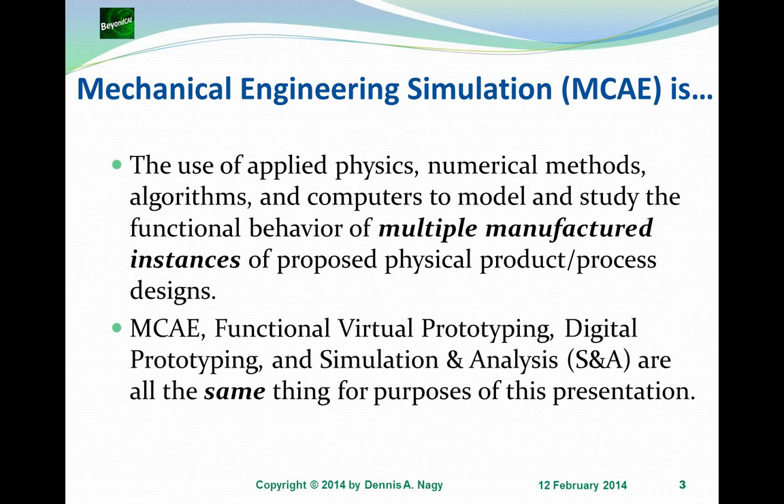The topics I'm going to cover here are a little bit of a historical perspective, how MCAE transitioned from primarily a technology topic and subject and activity to one where business more and more drives it today.

Vendors who came into existence with that technology to create software and related solutions for industry have grown up, and some have consolidated, others have emerged more recently. So it's still a very active pipeline, I would say, of companies at all levels of size and maturity in the MCAE vendor world.

I'm going to talk a little bit about the structure of the MCAE vendor industry, who are the major players, what relationships do they have with each other, some technology issues, and the rest will be covered in the next webcast on the 25th, where I talk about where all this is leading to in the future, in my opinion.

So I found this is an interesting way to describe what's called the engineering simulation food chain, where you start out with, as I said in the earlier slide, physics, math, computer science, all enter and combine into research that develops methods for doing engineering simulation.

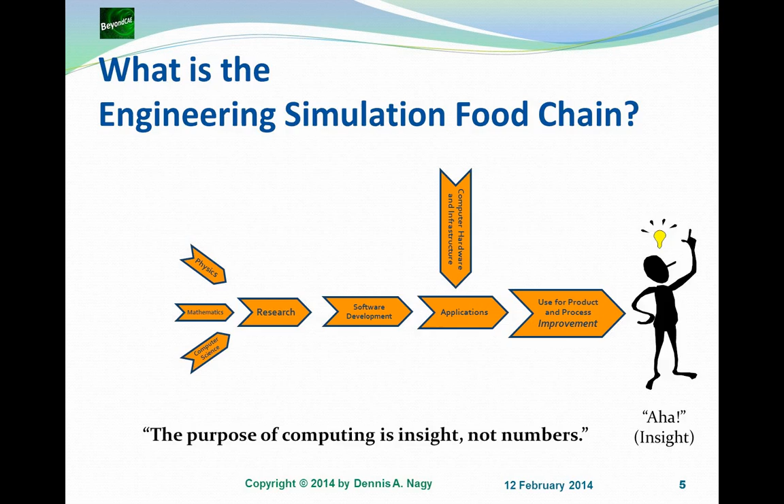And the roles of these various entities that play in this food chain, I'm going to show here just as a background to where then I'm going to focus a little more. You have at this end, of course, universities and government laboratories primarily. Clearly, some software vendors are also involved in some of that very basic research if they have the money and the bandwidth to do that. But in general, it comes from universities and government labs.

Then the independent software vendors pick that up in the form of collaboration, in the form of funded research, or just taking the published technical work papers and then implementing them in software, sometimes taking software that was developed in a research mode and making it production ready, commercializing it. But anyway, that's their emphasis, and they go on into being involved in applications because that's what drives the software development if it's going to be useful for industry.

They have to understand the key applications that they're targeting, which is why a number of software vendors have consulting arms that represent anywhere from 10 to 30% of their overall business, because that's their proving ground as such with real industry problems. As you get into the application area there, you see that computer hardware and infrastructure enters in, that the software vendors also have to interact with and have partnerships with the various computer hardware companies and infrastructure companies. You get a lot of engineering consulting services.

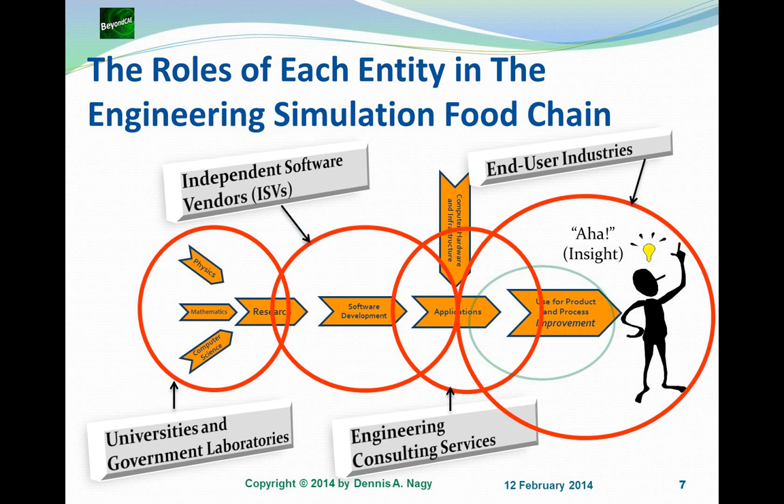And then finally, of course, the big payoff are the end user industries, where all of this, hopefully, if it's all been done right along that food chain, leads to productive use by more and more people in end user industries wherever simulation can, in fact, provide additional insight. That's a whole separate topic that I'll get into more in the next webcast on the 25th as to what are the trends there and what are the enablers and so forth. So here's what I'm focusing mainly on, what you see in the green oval there, both in this webcast and the next one.

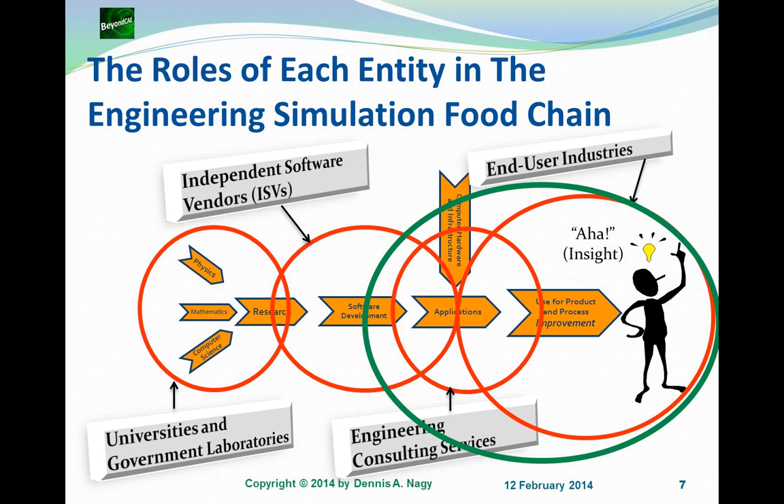So here's a little 5-cent tour, as I call it, or 5 euro cent for those of you listening in from Europe, or some number of yen or whatever, renminbi. This is the short tour going back to the 50s and 60s, where basic R&D work and the first very simple software programs were done, mainly in the aerospace industry, or ironically in the civil industry in frame and truss structures. Boeing, MIT, NASA, European Space Agency, and others were key players and entrants that early on.

The sort of seminal paper on the finite element method actually came from 5 authors at Boeing in 1956, and they continued to do their own development. Also, a number of aerospace companies pushed NASA to get into the game, and NASA put out an RFQ, which led to the funding and development of Nastran, which I'm sure a lot of you are familiar with, back starting in about 1966. MIT started developing engineering software for civil engineering in the early 60s already, and it got much more intense in the late 60s. I was, in fact, as a student there, involved in some of that back in those days. And I could go on here, but it's not as critical as saying, okay, where did this go to?

Mid-60s to 70s, the basic methods for MCAD, which was really computer-aided drafting, came into play, which provided better information on geometry for doing simulation, as well as early commercial MCAE software came into being around that time. And of course, the emergence of sufficient compute power to allow somebody to do any kind of reasonable simulation. So companies like MSC, SDRC, ANSYS, Abaqus, Marc, MathWorks, and others were founded during that time frame. As you see, and I'll mention it later, a number of these have in turn been absorbed into larger companies as the industry consolidated into the bigger CAD and product lifecycle management industries.

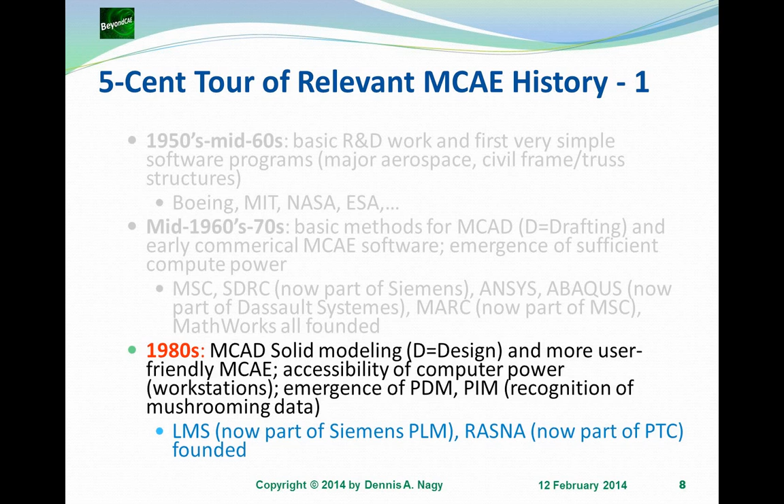Then in the 1990s, you really started to see the true linking of solid modeling, MCAD, to MCAE in wider production use. More and more of the CAD and PLM companies started cooperating with CAE companies to produce bidirectional interfaces and the ability to pass CAD geometry in a form of solid models to CAE programs for applying loads, boundary conditions, pressures, whatever, and meshing, and then running the

simulations. And the whole issue is related to how clean does that geometry have to be, who's going to clean it up, the CAD companies or the CAE companies. All those issues began to be recognized, and progress was made in starting to deal with those.

A key aspect also, which laid the groundwork for optimization, is the idea of variational modeling or parameterized CAD models. Parametric Technology as a company was founded based on that new concept. Others followed with, quote, variations on that, pardon the pun, and had introduced variational versus parametric, but they all in

some form or another had the ability to create solid geometry that was in some form variable or parameterized, which then means when you're doing simulation, you can in fact, on top of that, create optimization loops where some of those parameters are the targets of an optimization algorithm and then get changed back in the solid model and then run through again and so forth.

Small and medium businesses, or small and medium enterprises, SMEs, as they're fairly interchangeable, in the general manufacturing areas and consumer products started to use more and more MCAE in the 2000s. And also chemical processing, which overlaps with energy in the oil and gas area in particular, and oil refining, also got more and more into MCAE in the 1990s and kept on going in the 2000s.

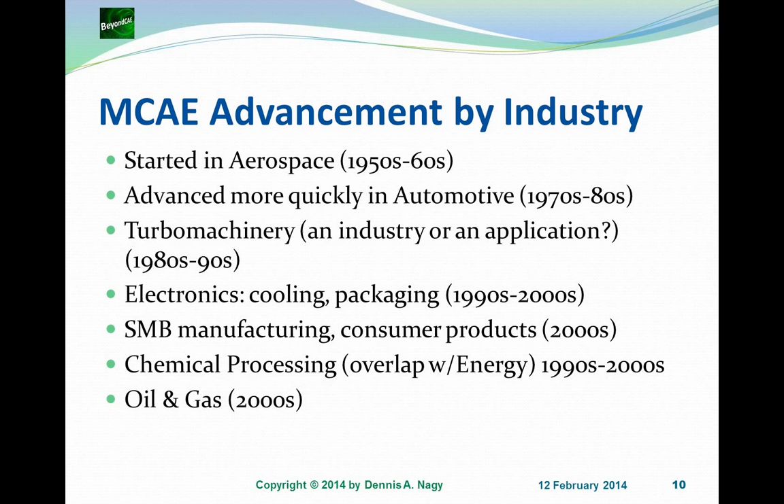Oil and gas, as a part of that, was a little late coming for many reasons. I won't go into all those now. So it really started seeing more use during all of the 2000s. So what were the typical historical obstacles, and what are the steps to further business impact of MCAE that drove both that historical overview that I showed, as well as the different industry penetrations?

Well, first of all, everybody said, can we trust the results of simulation? The old cliche of, everybody but the test engineer believes the test results, and nobody but the analyst believes the analyst results. Well, that's not true anymore, but it was a guideline that made people realize they had to do a lot more to convince people to trust the results. And that led to improving the accuracy of methods versus traditional physical prototype testing. And that was the first obstacle to overcome.

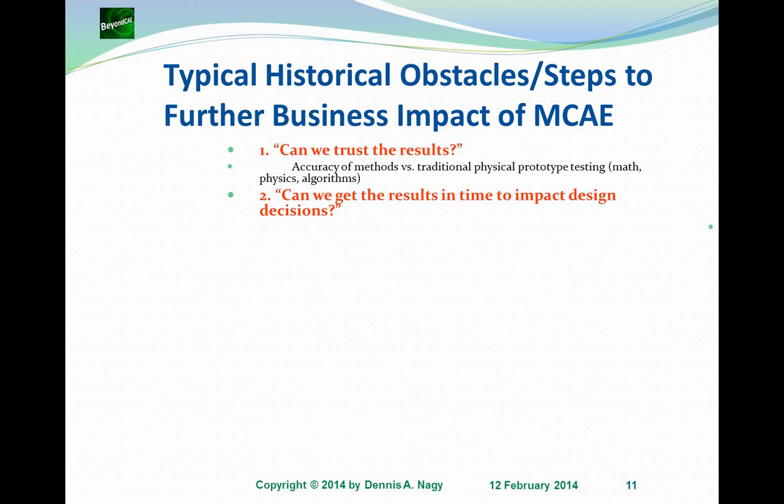Then you had, okay, we now believe they're accurate enough, but can we get them in time to impact design decisions? I mean, there's a certain timeline in companies where the results from simulation need to be known in time to give somebody the right insight to make a better decision. So digital processing and communication speed had a lot to do with getting those results in time.

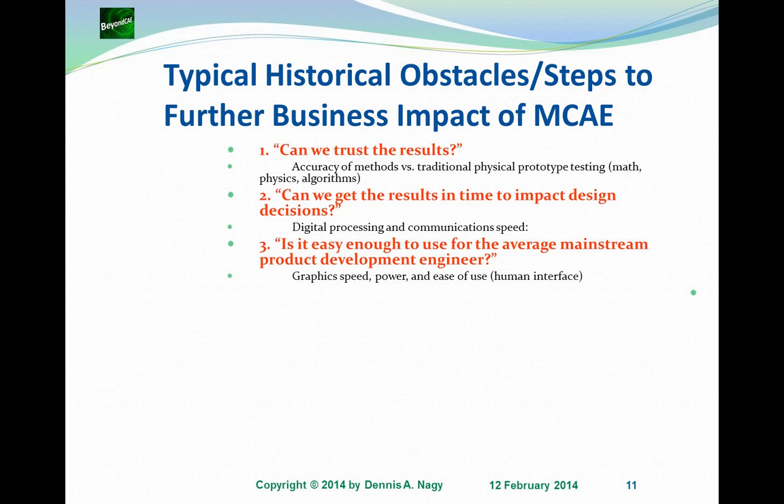Also organizational issues. Then the question that was much more organizational was, is it easy enough to use for the average mainstream product development engineer? That in turn had to do with graphics speed, power, and ease of use, the human interface, which related to the previous point. If you can't do the simulations quickly because you're fighting with the ideas of how to apply the loads and boundary conditions and create the mesh in a clunky user interface, then you're not going to get results in time.

Finally, everybody was using a lot of different tools and different groups even, and they asked how much time is lost in between the use of individual MCAE tools, which again slowed down getting to that bottom line, how does it impact our business? So incompatibility of tools and data, interoperability and integration issues all played a role there.

Finally, how do we overcome the sequential silos preventing multidisciplinary upfront MCAE? That was because of how companies were organized from the pre-simulation days, and what changes had to take place in both the mindset of engineers as well as the management of how those engineers would be organized, which then had a lot to do with business processes in product development.

Then related to that, of course, was how do we overcome fear of change and risk aversion? We all know that engineers are extremely risk averse, and so a lot had to do with the company culture related to introducing, accepting, and embracing MCAE.

And finally, making that all visible to upper management to answer their question, which is the only thing they care about ultimately, is what is the business payback? In other words, getting executive vision and top-level buy-in up to the level of enthusiasm, not just acceptance, for the strategic value of MCAE, and that's an ongoing process today.

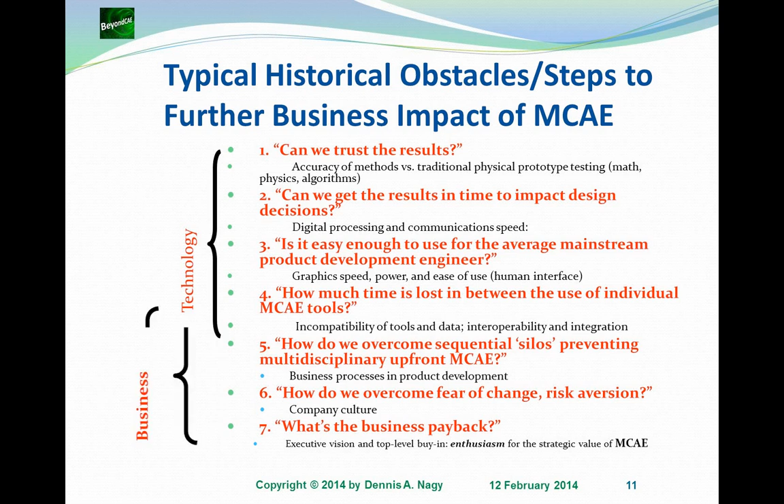These first four, maybe slightly into the fifth one, were mostly technology issues. The ones after that became more and more business issues as well, not totally, but business tended to dominate as everybody tried to progress through those seven.

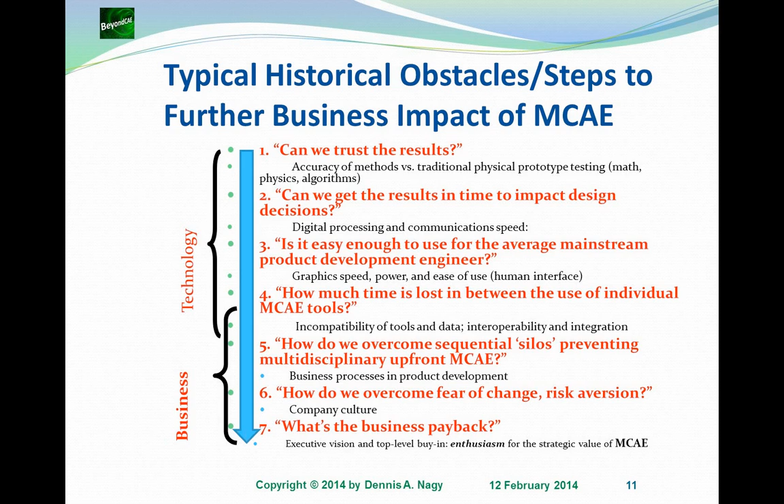The progress through the 7 steps varies by industry: aero, auto, turbo, energy, and consumer products, as I said in a previous slide, and also something to do with the company size and the role of the company, meaning are they small to medium enterprises, are they the major OEMs in the automotive and aerospace industry, or are they suppliers to those major OEMs? And that determined a lot of how they progressed through those 7 steps. It varies by company within the same industry.

There's leaders versus laggards. Michelle Boucher of Aberdeen did some interesting studies here in the last couple of years to get some data on some of that, and you ought to take a look at that. Go to the Aberdeen website if you haven't seen any of that. There's some good information there.

Today, progress doesn't, in my opinion, vary significantly by industrialized geography, the so-called first world. Western Europe, North America, and Japan, Korea are all basically at the same point, even though Japan and Korea had a slight lag way back in the beginning, but they caught up. And of course, the BRICS, as they're called, Brazil, Russia, India, China, are catching up very fast.

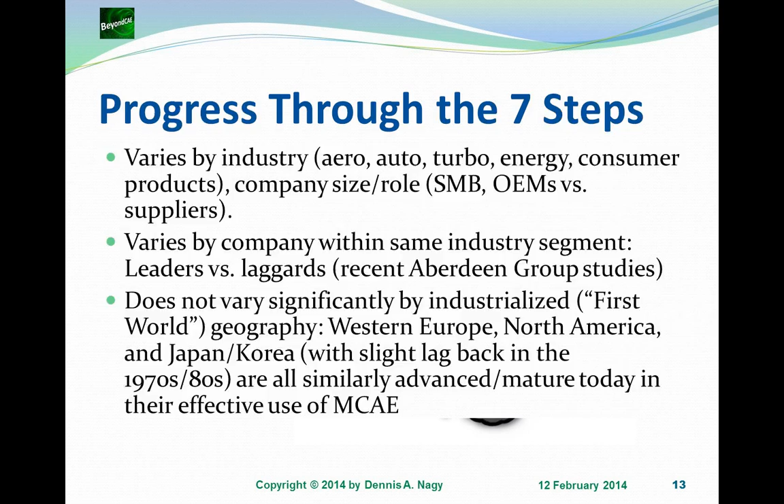Okay, the MCAE industry today, it's obviously, as I said, complex, diversified, and in some ways not well tracked as an industry. So a number of us feel that it's at least a $2.6 billion global annual revenue industry, but a lot of that depends on who you ask and how many companies of which kind are included in that number.

I'll mention in another slide very quickly a big chunk of that comes from one company that may or may not be considered MCAE. In general, we believe that it has about a 15% growth rate that varies over different companies and is a little hard to measure because a lot of those companies are private and don't publish their results in any way. There's at least 80 MCAE vendors,

from big companies of 800 million US dollars annual revenue and greater down to a whole bunch that are less than $1 million. Some of those vendors are actually parts of larger PLM vendors. Some are standalone vendors, and they serve industries and customers from huge multiple-hundred-billion size customers down to customers who are also less than $1 million in revenue.